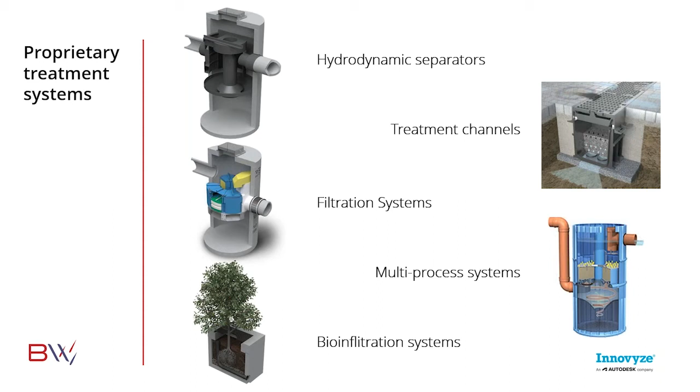the presentation. The first document on the list is the British Water Code of Practice for Assessment of Manufactured Treatment Devices, and that was launched back in 2016. This is a voluntary lab test protocol to generate supporting data for the derivation of mitigation indices for manufactured devices. Now, the tests entailed in this are based on elements of the US New Jersey Department of Environmental Protection and the German DIBT test protocols. But the tests adopted have been adjusted to ensure that they are suitable for UK conditions.

Now, our original aspiration with the how-to guide was to have a document that was, say, half a dozen pages long and easily digestible. But once you factor in all of the design questions and handling of test data from different sources, we've ended up at a document of around 60 pages, and that covers a comparison of prevalent test protocols for manufactured systems, a range of design examples for selection and sizing of manufactured systems, derivation of the mitigation indices, comparison of the mitigation indices against field data, and how to map tested mitigation indices to a range of product sizes.

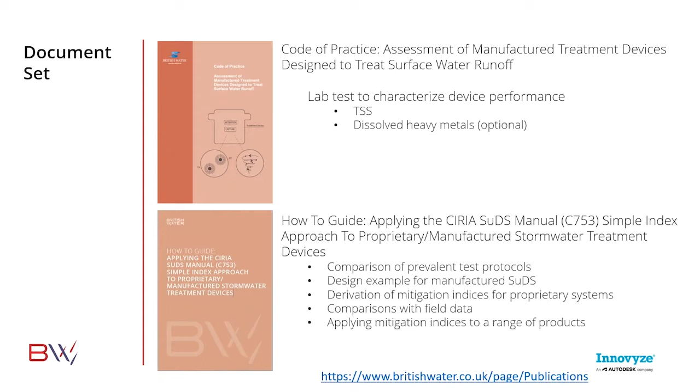So moving on to the design processes laid out in the SuDS manual. Now, I would hope all of the attendees are familiar with the SuDS manual, but for those of you wondering what on earth a mitigation index is and why you should care, we'll go through a bit of an introduction to set the scene. The SuDS manual is a very comprehensive guidance document published by CIRIA. The underpinning philosophy is there are 4 aspects or 4 pillars which are pivotal to the design of SuDS schemes. And these are water quantity, water quality, amenity, and biodiversity.

The SuDS manual, of course, contains many answers and where available has robust supporting evidence for its design processes. Now, although it's a guidance document, many aspects of the design principles are now regularly seen in local planning requirements, so you're seeing a lot of the guidance become mandatory. Now, the only downside is this document is around 1,000 pages long, so we will need to restrict our focus today to the chapter on design principles for water quality, and more specifically, the simple index approach.

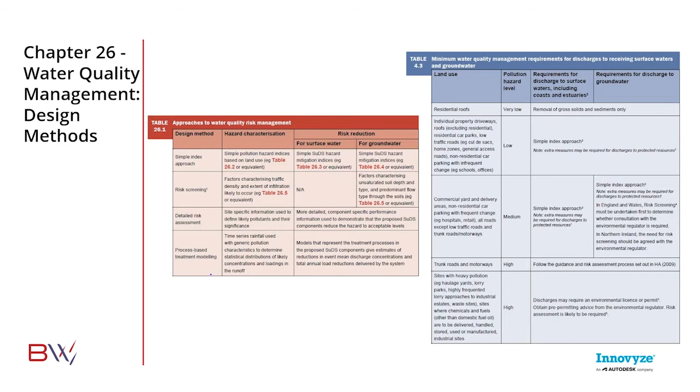So moving on to the SIA design process itself. Now, this is a bit of a busy slide, but it's the minimum content required to give a bit of a crash course in the simple index approach. So bear with me and I'll talk you through an example. The SIA design process takes a source pathway receptor approach. So it quantifies what hazard a particular site or source presents, and it requires that the pathway provide mechanisms to give acceptable pollutant levels by the time the flow reaches the receiving water body, which is the receptor.

Now, in the SIA process, 3 pollutants are considered, and they are TSS, total suspended solids, metals, and hydrocarbons. A value named the pollutant mitigation index is used to rank and select SuDS components that reduce hazards to an acceptable level. So if we run through a quick example of this, step 1 is to allocate an appropriate hazard index for the site, and these are contained in table 26.2. Taking the case of a residential development, which is low risk, we have pollution hazard indices of 0.5, 0.4, and 0.4 for TSS, metals, and hydrocarbons respectively.

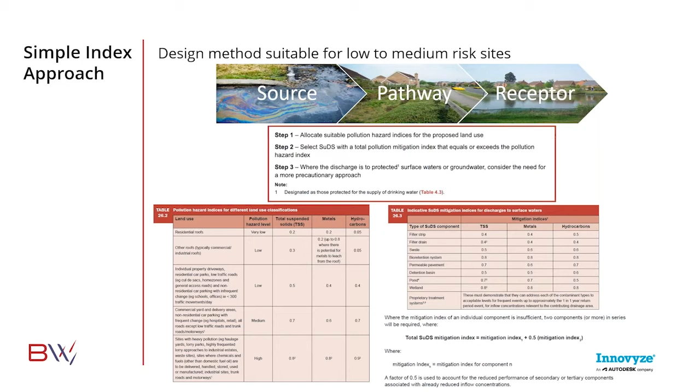Now, the difficulty that the manufacturers face is that table 26.3 contains mitigation indices for green or natural systems, but not for manufactured and proprietary systems. So this is the gap we're bridging with the documents published by British Water. And I will just touch on where the mitigation indices for the greener systems come from, as it's relevant to understanding what they represent and what we need to establish for proprietary systems.

Now, we don't need to go into this in too much detail, but I'll give an example of how you arrive at a mitigation index. So for a detention basin, the measured TSS inflow interquartile range is between 20 and 114 milligrams a litre, and the output is between 10 and 47. So you're getting around a 50% reduction in TSS between the inlet and the outlet.

The mitigation index given in table 26.3 for a detention basin is about 0.5, so it corresponds to that value, and I hope that gives a bit of traceability about where these mitigation indices come from.

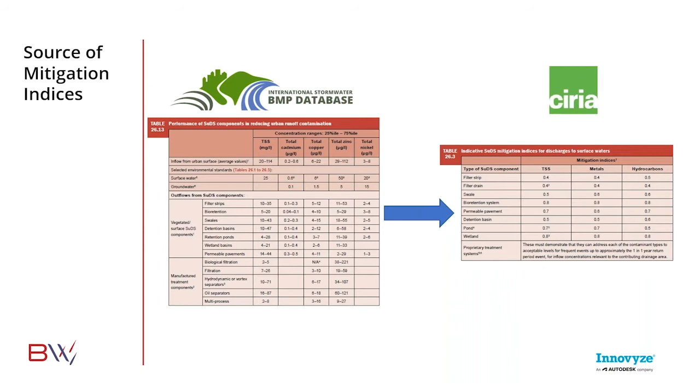So if we jump and look at that requirement in a bit more detail for proprietary systems, which is shown on the bottom of table 26.3 in the SuDS manual, the requirement states proprietary systems must demonstrate they can address each of the contaminant types to acceptable levels for frequent events up to approximately the 1-year return period event for inflow concentrations relevant to the contributing drainage area.

Now, that is a bit of a mouthful, but what it's essentially left manufacturers and proprietary systems required to do is quantify and demonstrate annual pollutant inflow and removal rates for TSS, metals and hydrocarbons up to the annual treatment flow rate. This requirement is of course aimed at giving a value that is equivalent to the mitigation indices already found in table 26.3 for the green systems.

So in response to this requirement, the British Water Group has developed a standardized and robust approach for the derivation of mitigation indices.

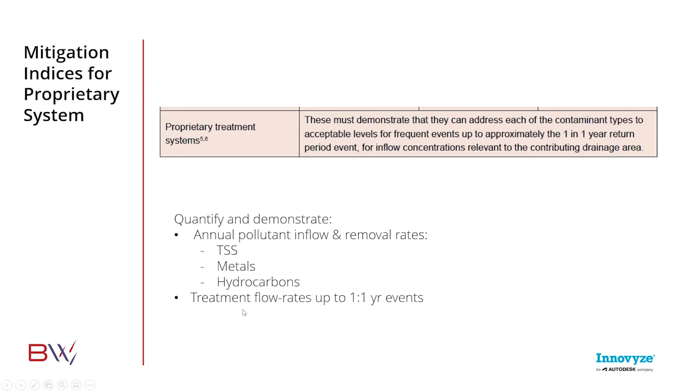The removal of hydrocarbons is not tested or covered in the code of practice. If there is significant risk of hydrocarbons or spill events, then designers should be referring to PPG3 and using EN 858 certified systems. Further information on deriving a hydrocarbon mitigation index for a manufactured device is contained in the how-to guide, which we'll get to in a moment.

What you can see from the code of practice test setups is they look similar despite the scale. What we're really doing is controlling the flow rates and inflow concentrations, and then measuring the output concentrations to determine the pollutant load reduction for that device.

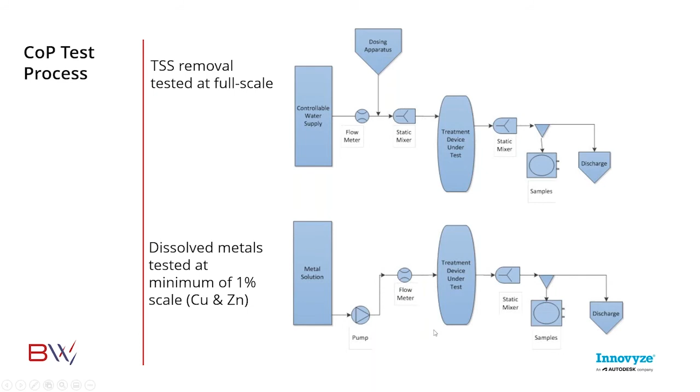I'll just touch on the flow rates we use for the testing, because this is where we have placed a lot of the effort in ensuring the code of practice and how-to guide are representative of UK conditions. Now, broadly speaking, urban pollutant loads and sediment distributions don't vary that much between Western countries with temperate climates, but what does vary a fair amount is the rainfall distribution. So to ensure the design and testing procedures are relevant to UK conditions, we've derived the test flow rates directly from UK rainfall data.

So we took EA rain gauge data for 8 cities and we processed these to determine the rainfall volume contributions related to the variation in rainfall intensity. And what we found is, while there's some variation, when you average these out over a number of years, they're quite similar across the whole of England. There's actually very little difference in the peak intensity.

Now, that means we can effectively use one set of test flow rates and one distribution, and it's suitable for all regions, which makes life a bit simpler. This analysis was undertaken by HR Wallingford and Cranfield University.

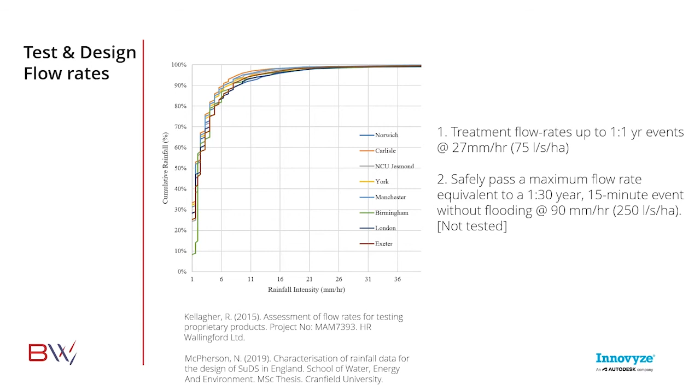So we've spoken about the testing. Moving on to how these test results feed into the how-to guide and are used to derive mitigation indices.

The how-to guide gives procedures for deriving mitigation indices for multiple recognized SuDS assessment protocols. So it can accept test results from the British Water Code of Practice, the New Jersey Department of Environmental Protection Testing, or the German DIBT test procedures.

Unfortunately, none of these test procedures give a complete set of data for deriving mitigation indices. The how-to guide is there to fill in the gaps and provide calculations to give a complete set of mitigation indices and make sure that the test values are adjusted appropriately for UK conditions.

If we take the route of the British Water Code of Practice testing as an example, the Code of Practice only presents lab tests for quantifying annual load reduction of TSS and dissolved metals. Hydrocarbons and the solid phase of heavy metals is absent.

The how-to guide then explains how these values are populated to arrive at a full set of mitigation indices for TSS, metals and hydrocarbons. There's no pass or fail in this process. It effectively allows manufacturers to declare or prove any mitigation index value, giving flexibility to both manufacturers and designers to target what suits their needs.

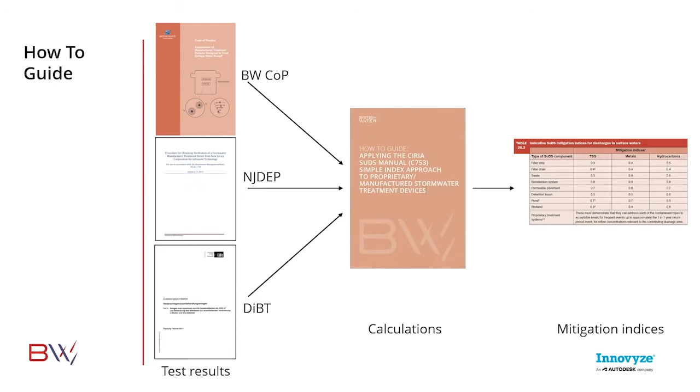And the outputs of this assessment process are 3 documents. The first will be a test report according to the British Water Code of Practice or other equivalent test protocol that we've discussed, and this will of course be signed off by the test house performing the testing. But that typically only focuses on assessment of a single unit size.

And this is where the second document and the how-to guide are relevant. The second document is a declaration of a full set of mitigation indices and the flow capacities or drained areas for a range of unit sizes in a product range, if they exist.

And the third document we're recommending is an independent verification statement. This is effectively a desk check to ensure the mitigation indices and flow rates have been derived correctly, and should be signed off by an appropriate independent consultant.

We've taken this route because British Water is not a certifier or a regulator, but completion of the full process allows manufacturers to demonstrate that their published mitigation indices are appropriately evidenced and derived in accordance with the requirements set out in the SuDS Manual. And that, of course, translates into any planning constraints derived from the SuDS Manual.

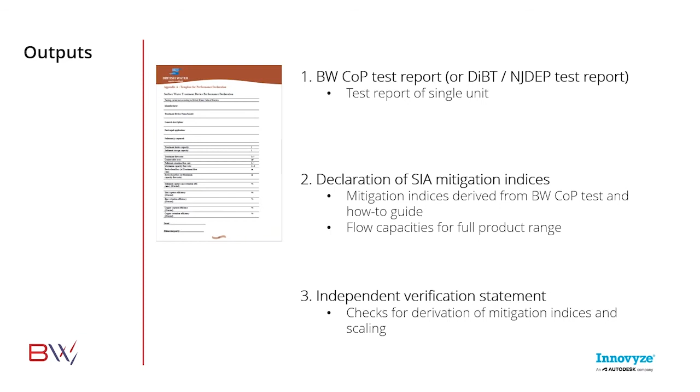At the moment, British Water is in the process of setting up a website to house these output documents listed on the previous slide. This will be a repository of supporting information for designers and SuDS approvers, so they don't have to go hunting around through several manufacturers' websites and can very clearly see what's been through this process. You don't need to be a British Water member to contribute or access this list.

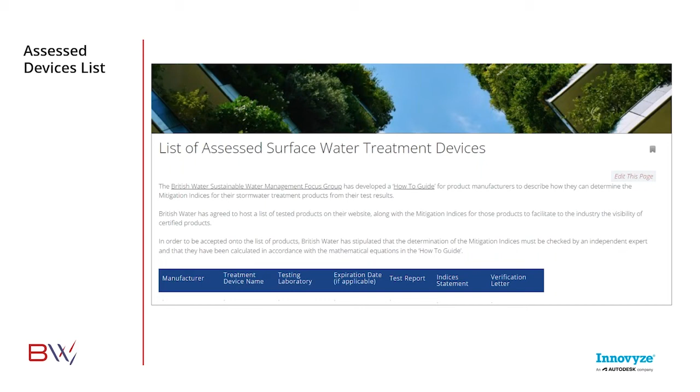Finally, my final slide before I hand over to Joe. In acknowledgement that no process or guidance is perfect, we've set up another web page to capture any clarifications or questions that need addressing as various parties undertake the testing. This is to capture and close off any difficulties or loopholes and ensure a consistent approach for all parties. When this is sufficiently populated, we can use it to update and revise the British Water documents. That concludes my part of the webinar, and I'll hand over to Joe for a few applied design examples.

Thanks, Dan. That was brilliant. A number of times I sit through that presentation of yours and I still learn something every time.

So what I'm going to talk about is the practical application of the mitigation indices. So whether you're a manufacturer or a designer, the mitigation indices are coming out onto the market, and I'll talk a little bit here about how you might apply them and use them in your designs.

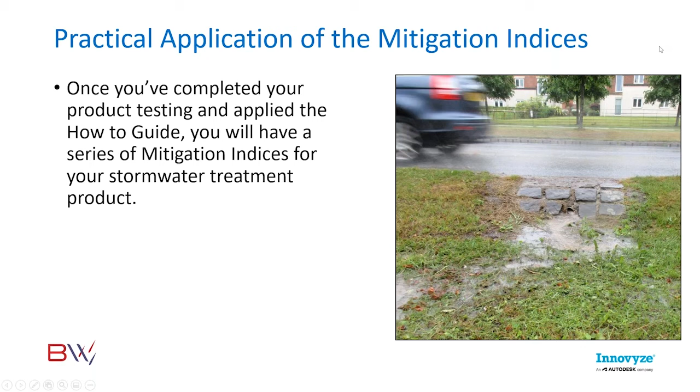Or I would if I stopped muting myself. Bear with me.

It's important not to forget that the how-to guide and the British Water Test Protocol both assume that the principles and design protocols set out in the SuDS Manual have been followed. So regardless of the work we're doing here with mitigation indices for manufactured devices, you must remember to take the whole picture of SuDS design as described in the SuDS Manual.

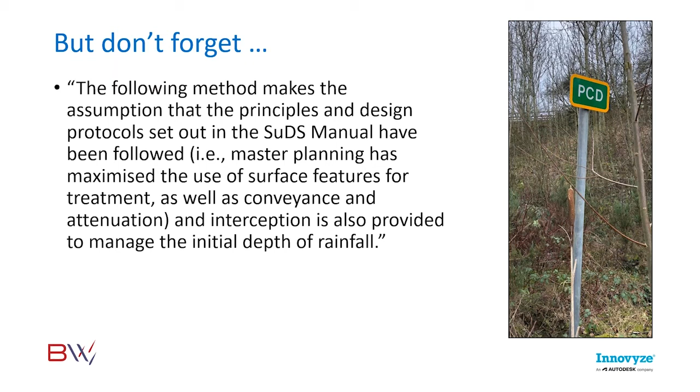So do that master planning, look at your topography, look at your infiltration capabilities, and understand how much water you need to attenuate. All that has to be done as well. This is not a standalone piece of work, it's part of the whole SuDS design picture.

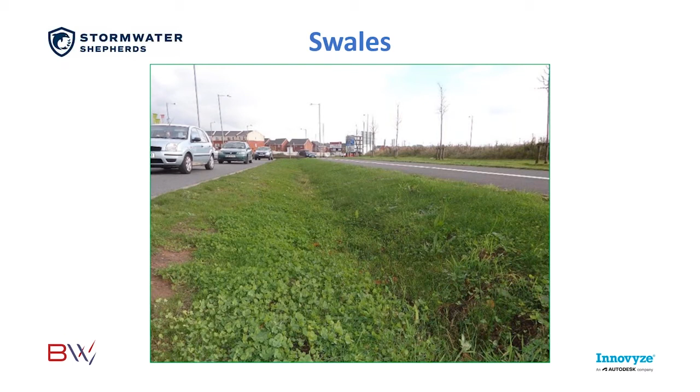Just a couple of examples. This is a swale, which I guess you're all familiar with, located in a place called Chorley in Lancashire. I'm going to show you how you'd apply the simple index approach to a swale, and then we'll go on to talk about how that moves forward to include manufactured treatment devices following the publication of the how-to guide.

This swale in Chorley is well-designed because it has over-the-edge drainage, so runoff from the road comes over the edge, down the grassy incline, and into the conveyance channel at the bottom. The pollutants are caught up in the grass, soak into the soil, and are broken down by sunshine and microorganisms. An excellent SuDS device.

In the SuDS manual there are mitigation indices provided for a swale like that, and you can see them in column 1: 0.5 for TSS, 0.6 for metals, and 0.6 for hydrocarbons. That is the mitigation available from that swale according to the SuDS manual.

The hazard indices for a low risk site are 0.5, 0.4, 0.4. So that swale on its own satisfies the requirements for water quality design for that urban surface. You just need that swale if you've got a low risk site.

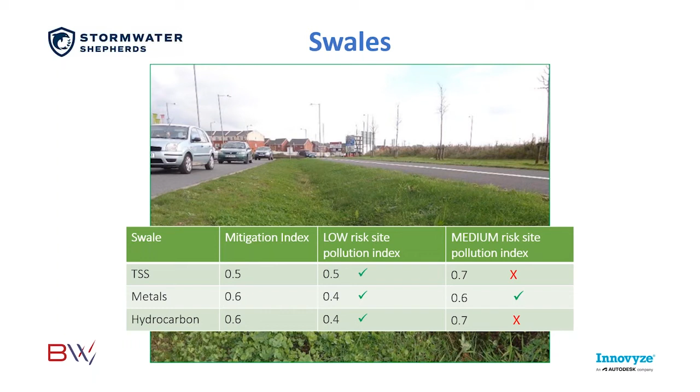But for a medium risk site, shown in the right hand column, the pollution hazard indices are 0.7, 0.6, 0.7. So the swale on its own isn't good enough—it doesn't give you enough mitigation for a medium risk urban surface. That's how the simple index approach works in practice for a vegetative treatment device.

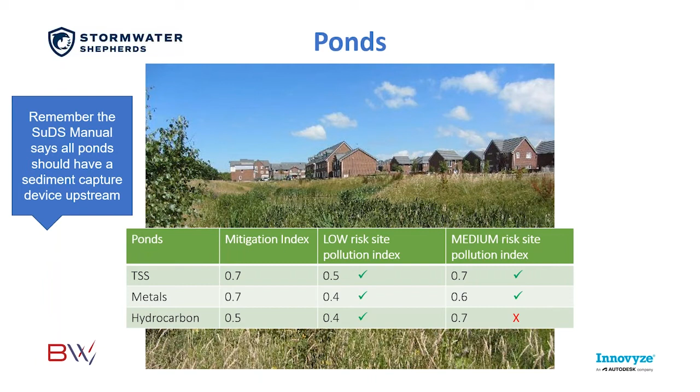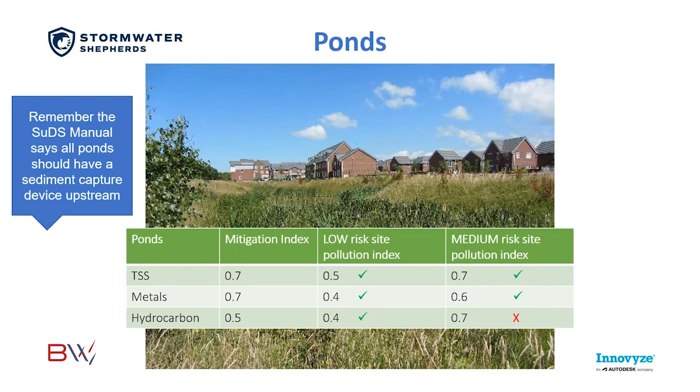But the SuDS manual says all ponds should have a sediment capture device upstream, because that prevents the pond filling up with sediment and pollutants. If you do a SuDS management train, as Dan suggested, you'd have two sets of mitigation indices and would easily achieve the mitigation required to meet the hazard indices for that medium risk site. So SuDS management trains give you the opportunity for better mitigation by having two or three devices.

This is where manufactured devices come in, and this is why we did the British Water Test Protocol and the how-to guide—because it allows you to incorporate these devices into your design. They become part of what you might call hybrid SuDS. You might have a manufactured device and then a vegetative device, and marry up the two sets of mitigation indices to give you the water quality improvements you need.

So, same table. In that first column, you've got the mitigation indices, and they are now provided by the manufacturer.

These mitigation indices are precisely what have been derived using the how-to guide by the manufacturer. If you speak to the manufacturer of a vortex grit separator, they will give you mitigation indices. So an example here of 0.5, 0.5, 0.7. Different manufacturers will have different results depending on their test results. But for a low risk site, those mitigation indices for that vortex grit separator satisfy the water quality requirements of SuDS design. So for a low risk site, you just need that vortex grit separator, job done.

For a medium risk site, your pollution hazard indices are too high at 0.7, 0.6, 0.7, so your vortex grit separator on its own isn't good enough. But remember, that doesn't matter, because you have to deliver all 4 pillars of SuDS. So today we're focused on the water quality aspects of a SuDS design, and this device will give you compliance with your water quality aspects for a low risk site, but you still need to do water quantity, biodiversity and amenity.

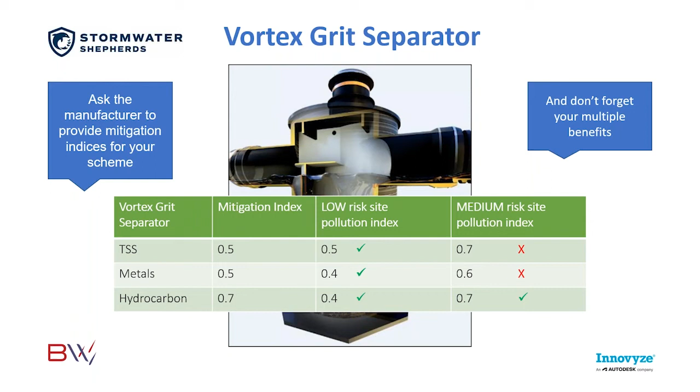So you still need to deliver attenuation and a habitat for wildlife and pleasing places for people in your SuDS design. So you have to have other devices built in and around the vortex grit separator to deliver those multiple benefits. You can start to see that you are building up a SuDS management train that's delivering all the requirements of the SuDS manual, but doing it using a variety of devices.

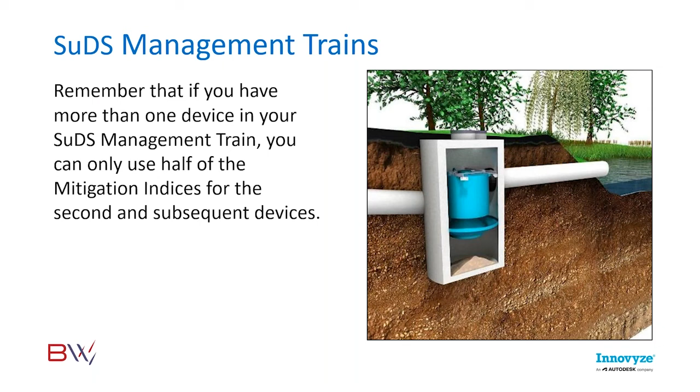And then the other really important thing to think about is the treatment flow rates. This is something we spend a lot of time talking about in the British Water meetings, and it's important as designers that you give this some attention. You need to understand how your device is working in your SuDS management train and how much of the runoff it's treating. Dan's explained that you need to treat 75 litres per second per hectare for a low or medium risk site, but you probably have to convey more than that when it rains hard.

So you have to understand how your device is going to cope in a normal rain event, a subannual rainfall event, but also what's going to happen when it rains really, really hard. Where's all the water going to go, and is it going to whoosh the pollutants out of the device? So work out what you're using, work out what your treatment flow rate is, and then work out what the capability is of your SuDS management train.

So some devices like a filter can't tolerate huge flows because the filter will bung up, so you may want to put those offline. Some devices like a pond are designed to increase in volume when it rains hard and then allow some of that water to escape in a controlled way. But you need to make sure those things are happening and the treatment is not being affected by those hydraulic actions.

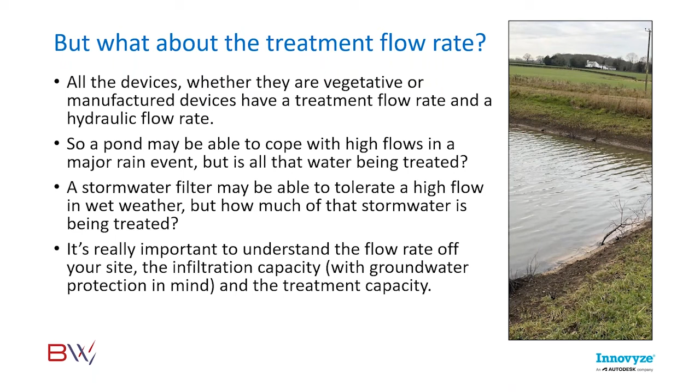So as we've said, 75 litres per second per hectare for low and medium risk surfaces, that's what you have to treat. But remember, for high risk surfaces, I know we're not focusing on high risk surfaces today, but you do need to think that if you're designing SuDS management trains for high risk surfaces, you need to understand where the water will go when it rains hard, bearing in mind that water will still be polluted.

So as we've said, some devices work really well, but they can only cope with little flows. So you put those offline and blend that runoff back. When we're looking at high risk surface design for water quality treatment, sometimes we'll treat a little bit of the runoff very, very well. We might remove 90% of the pollution in that little bit of runoff and then blend it back with the rest of the runoff to give us a total reduction that we need. So high risk surfaces are more complex, and you really need to understand what's going on with your water quality and your water quantity and how they're interacting with one another.

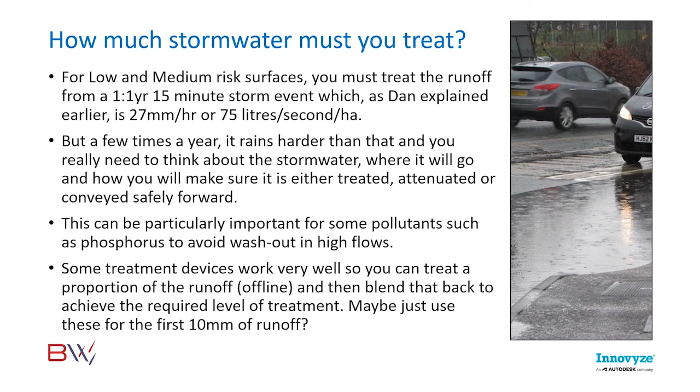So a couple of examples, and please note that these numbers are for illustration only. These are not specific mitigation indices for any of these specific products.

They're just illustrative. So in your SuDS management train, you might have a vortex grit separator at the top of the system to capture the suspended solids and associated pollutants. You might then have a stormwater filter to capture a particular pollutant like dissolved metals, and then a pond for polishing, removing some of the organic pollutants and more of the suspended solids.

So you can start to see with the mitigation indices there that we're building a really good water quality treatment train. We've got 0.5, 0.5, 0.7 from the vortex grit separator, then half of the mitigation indices for the filter, so 0.4, 0.4, 0.35, and half again for the pond, 0.35, 0.35, 0.25. So you're starting to build a really good SuDS management train, dealing with different pollutants and different processes for pollution control, giving you excellent improvements in water quality.

Things to think about: your vortex grit separator will usually take all the flows off the catchment, and high flows will simply bypass through the top of the system. Stormwater filters I prefer to see offline because, although hydraulically they can take higher flows, I prefer offline so there's no risk of washing and damaging the filter material. Ponds very often take all the flows, fill up when it rains hard, and the water level lowers after the rain event has passed. So that's one example of the sort of thing you can see in a SuDS management train that's really good.

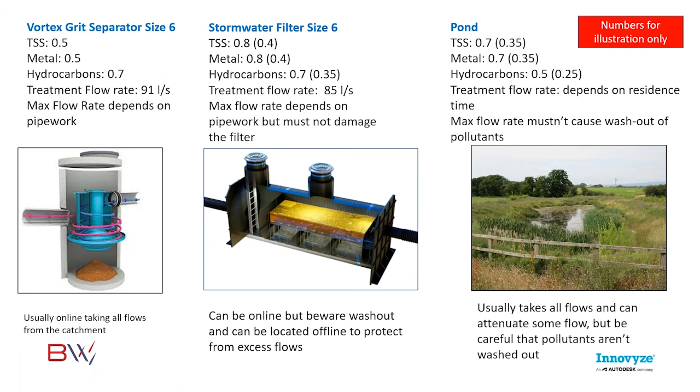Other items: we haven't talked about spillage risk, but if you've got a combination of spillage risk and pollution risk, you can have an oil water separator. A bypass oil water separator gives really good mitigation indices, 0.8, 0.6, 0.9, but it only treats the treatment flow rate declared by the manufacturer, and higher flow rates will bypass through the top of the system. Modular bioremediation zones are quite new to market, and they treat quite a small flow rate, but treat it to a high level.

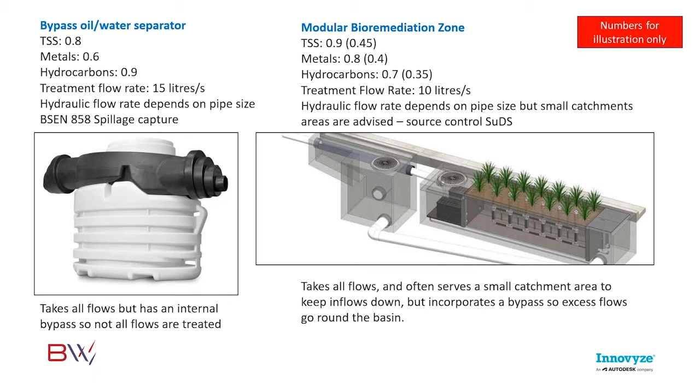So again, you can start to see that you can build a SuDS treatment train using devices like this to give you really excellent water quality improvements.

High-risk surfaces, I won't labour the point as we're running out of time, but please remember: spillage risk is more common on a high-risk surface, and also the need for closure devices. Sometimes your SuDS management train will do an excellent job, but you need a closure device at the bottom in case there's a massive spill on the catchment.

So if you have a catchment with a risk of spillages that would cause pollution, it's good to have an automatic closure device either upstream or downstream of your pond to protect the water environment from that spillage. You need to think about treatment flow rates in greater detail for high-risk surfaces, and please remember to consider groundwater protection, particularly on high-risk surfaces.

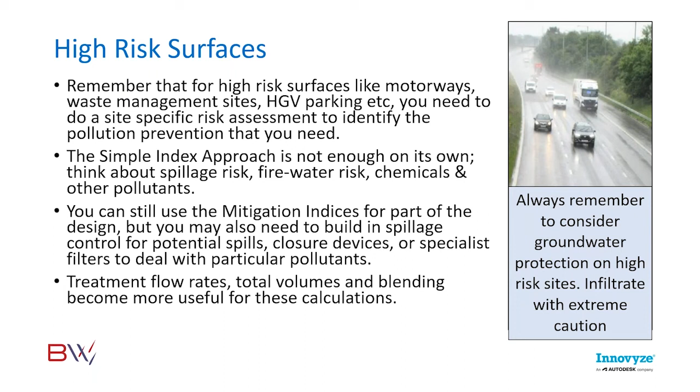We talk about infiltration a lot with SuDS, but just infiltrate with care, please. And the way you arrange devices is important. Sediment removal devices should be at the top of the system wherever possible, because if you get the sediment out first, that protects all your downstream devices. Actually, sediment wants to drop out as soon as the flow slows down, so have your sediment removal device at the top of the system.

Stormwater filters should be at the bottom of the system if possible, because the cleaner the water is before it goes through the filter, the more of that dissolved pollution you will remove. And spillage containment devices should be upstream of vegetative devices so that we don't contaminate the pond we've built.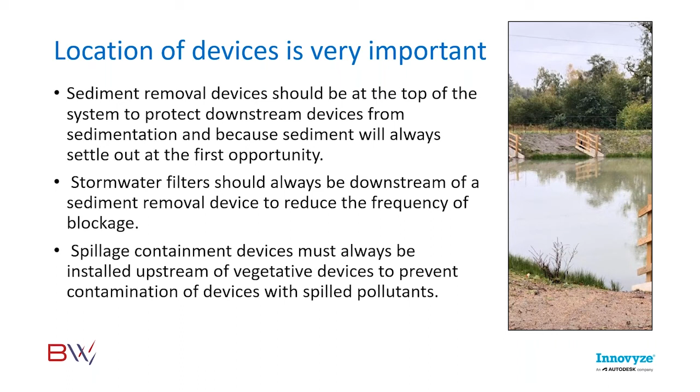That photograph I showed you of the pond in Chorley is a beautiful habitat for wildlife, and it would be a crying shame if there was a massive oil spill that went into it. So think about that. Don't create habitats for wildlife and then pollute them.

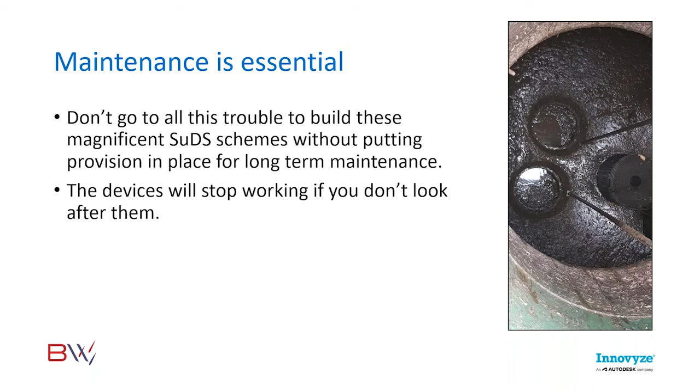Don't build brilliant SuDS and then not look after them.